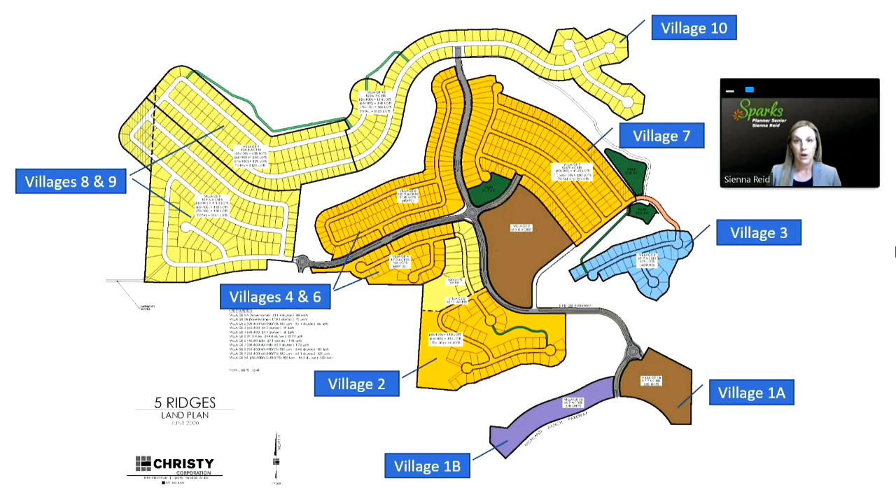For a little bit more background, in May of last year, the City Council also upheld the Planning Commission's decision on appeal to approve a conditional use permit for development on slopes, hilltops, and ridges.

A conditional use permit, or CUP, is required prior to developing sites that are larger than 10 acres in size and have slopes of 10% or greater over 25% or more of the site. The Five Ridges project site meets those criteria.

As you can see, the approved disturbance area includes natural slopes in portions of villages 1A and 1B at the southern portion of Five Ridges, natural slopes within villages 2, 3, 4, 6, and 7, generally in the center of the project site, and all or portions of villages 8, 9, and 10 located in the north and northwest portions of Five Ridges.

Areas of the site that were previously disturbed due to mining operations and roadway construction are exempt from CUP disturbance area calculations pursuant to the development agreement, and those are generally in the central portion of the project site.

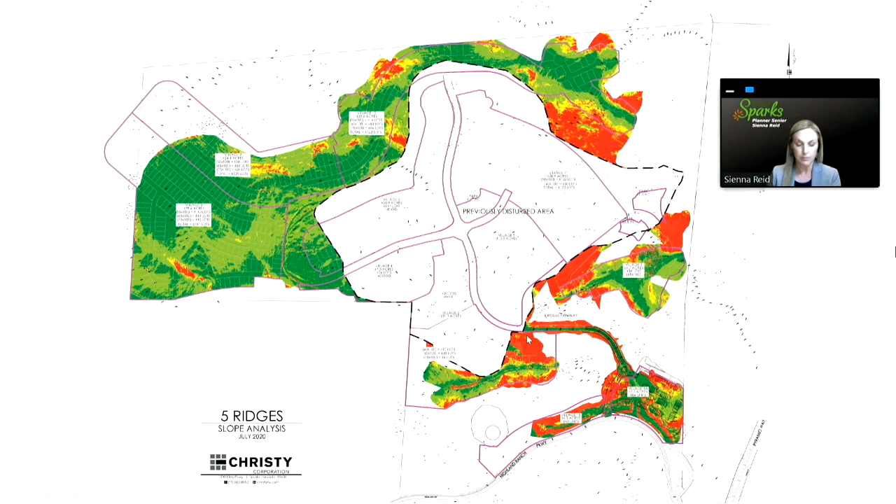Consistent with the code and the development agreement, the applicant at this time is requesting an amendment to the approved CUP to increase the disturbance area for natural slopes by a total of 19.8 acres. If approved, the disturbance area for natural slopes would increase from 138.13 acres to 157.93 acres.

The 19.8 acre increase is located in the northwest portion of the site within villages 8 and 9, and also in limited areas on the north sides of villages 1A, 1B, and village 10.

This request, it's important to note, also includes a review of grading plans for villages 1A, 1B, 8, 9, and 10 that were not provided with the currently approved CUP.

Per code, substantial material changes to a project require a CUP amendment. These grading plans do constitute a substantial material change, as the proposed grading will materially impact surrounding properties.

So the scope of this review for the CUP amendment tonight includes grading plans for villages 1A, 1B, 8, 9, and 10, and is not limited to just the 19.8 acre area where an increase to the disturbance area for naturally occurring slopes is proposed.

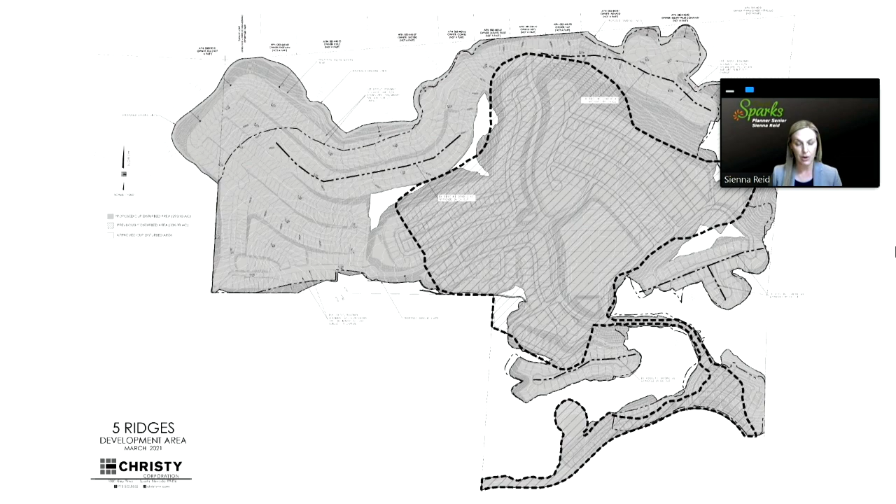From a broad perspective, to develop the Five Ridges project site, the grading plans shown on this slide in a relatively small scale show the applicant is proposing to cut existing hilltop and ridge features and use the resulting fill material to create building pads for future residential development. Fill will be used to fill natural depressions, expand ridges in the north and west portions of the Five Ridges site, and create elevated building pads in the southern portion of Five Ridges. I'll go into more detail on the proposed grading with the next couple of slides.

Village 1B generally slopes down from north to south. The northern portion of the village will be cut, and fill will be used to create a building pad that on the western side of the site is at a similar elevation to Highland Ranch Parkway. However, on the eastern side of the building pad, it will sit approximately 15 feet above Highland Ranch Parkway.

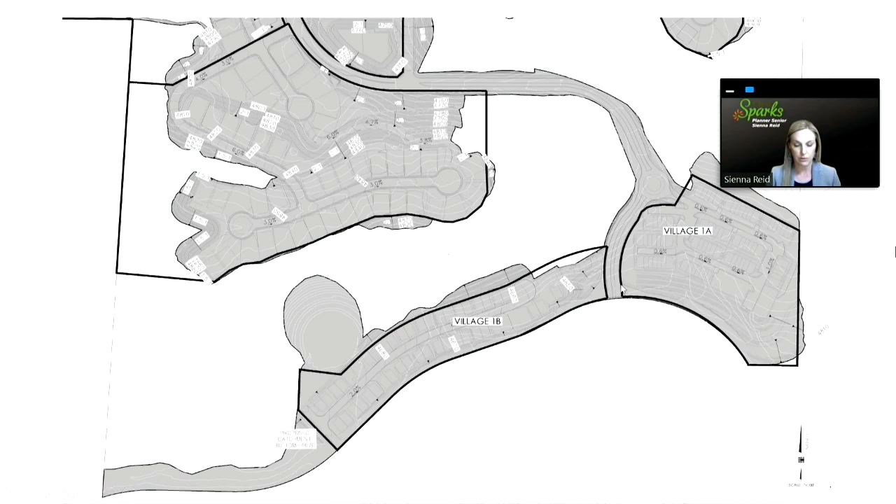To start off, existing slopes in the west and northeast portions of Village 8 - located in this general area that I'm identifying with my cursor - will be cut, and fill material will be used in the northwest and southern portions of Village 8 to create a building pad that generally slopes upward from east to west. Fill slopes spanning up to 40 feet in elevation will be created on the south side of Village 8, and fill slopes spanning up to 50 feet in elevation will be created on the northwest side of Village 8.

For Village 9, which slopes downward from south to north and is located in this general location of the project site that I'm circling again with my cursor - existing slopes in the southern portion of Village 9 will be cut, and fill material will be used in the north and northwest portions of Village 9 to create a building pad that generally slopes upward from east to west. At their longest points, fill slopes on the north side of Village 9 will span between 40 and 90 feet in elevation.

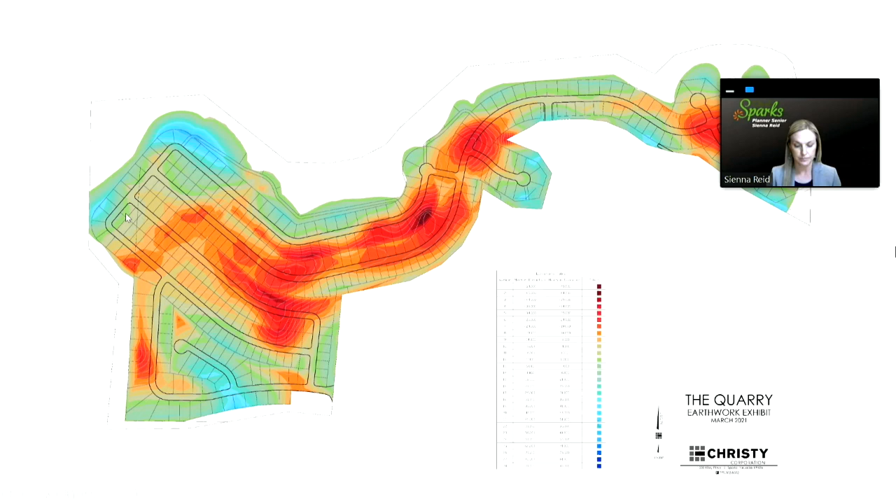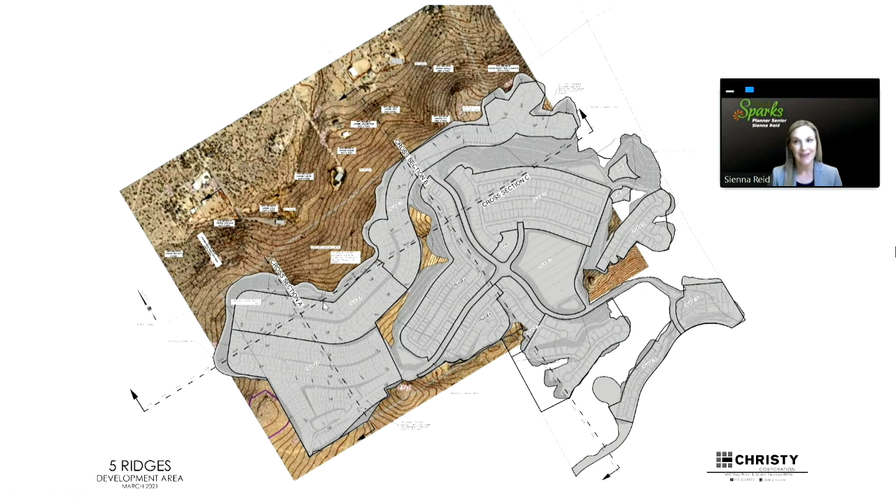Cross sections were provided by the applicant to illustrate this grading in two dimensions. Cross section A runs north to south through Villages 8 and 9. Cross section B also runs north to south through Villages 1B, 2, 6, and 10. And cross section C runs alternatively east-west through Villages 8, 9, 6, and then 7.

Graded slopes of 2 to 1, or 50%, are proposed within Villages 1A, 1B, 8, 9, and 10. Graded slopes of 1.5 to 1, or 66%, are also proposed within Villages 1A and 1B.

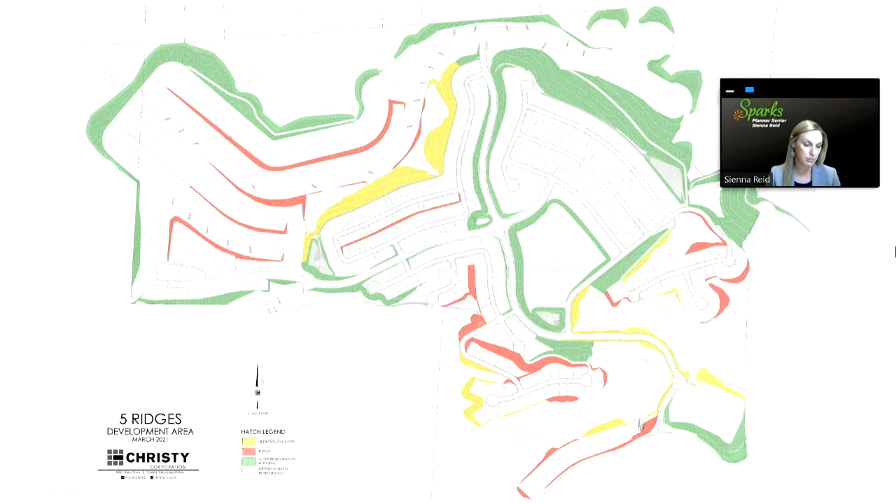Bedrock cut slopes, again with that gradient of 1.5 to 1, don't require mechanical stabilization, and they are shown in yellow, proposed in the northern portions of Village 1A and then also Village 1B in this location.

Transitioning to the code standards for development on slopes, hilltops, and ridges, and the findings applicable to conditional use permits the commission needs to consider tonight, we'll start with the standards in Sparks Municipal Code section 20.04.011, which governs development on slopes, hilltops, and ridges. From an order perspective, we'll go through standards C through G, and then come back to the design policies in B.

Starting with the grading standards, these standards establish the total area of a site that may be disturbed based on a slope analysis. As discussed earlier, the development agreement exempts the 136-acre portion of the site that was previously disturbed due to mining operations and roadway construction. For the portion of the site where naturally occurring slopes are present, the grading standards establish a maximum allowed disturbance area of 161.69 acres. Except for the disturbance of slopes of 30% or greater, these standards don't limit the area that can be disturbed in any single slope category.

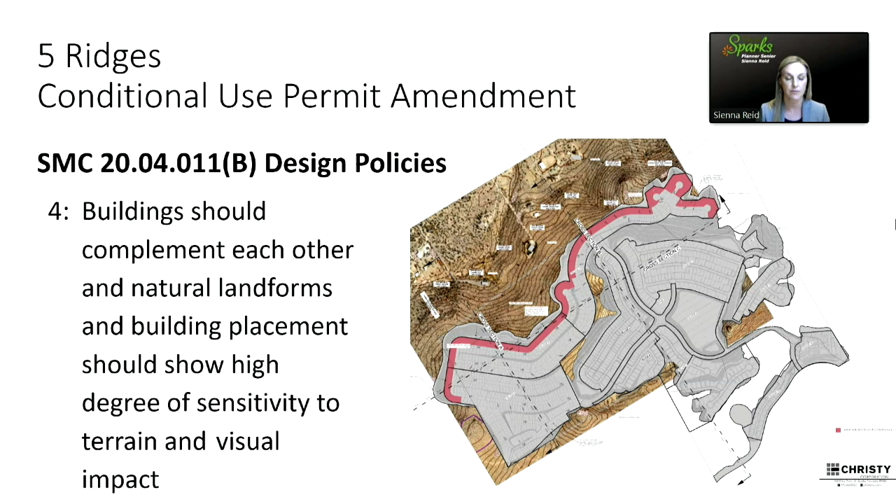Moving on to our general conditional use permit findings, the first that we have is C1, and that relates to compliance with the comprehensive plan. As proposed, increasing the allowed disturbance area by the CUP amendment request will enable development on slopes, hilltops, and ridges within the entire Five Ridges project site. This supports goal H2 and policy H2 by facilitating a mix of housing types consistent with the agreement, as well as the comprehensive plan land use designations present on the site, which allow for single family and multifamily uses.

The adopted development agreement details how city services will be provided to the site at acceptable service levels, which complies with policy CF1. For areas with slopes of 15 to 30%, policy RC 2028 indicates that total disturbance areas should be limited and that hillside adaptive architecture techniques should be utilized. Those techniques include, but are not limited to, the construction of structures on existing natural grade, split level foundations, height restrictions, and other similar techniques.

If this amendment to the conditional use permit is approved, the portion of the Five Ridges site with naturally occurring slopes that could be disturbed is less than the maximum amount of land area that can be disturbed pursuant to code and is memorialized in the development agreement, which complies with policy RC 28. As amended, Condition 6 also recommends that increased setback for two-story homes and height limitations for accessory structures further comply with policy RC 28.

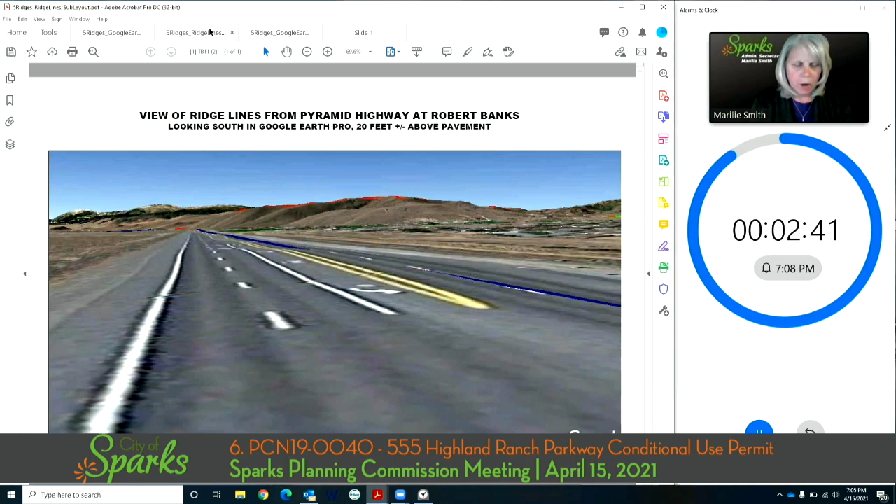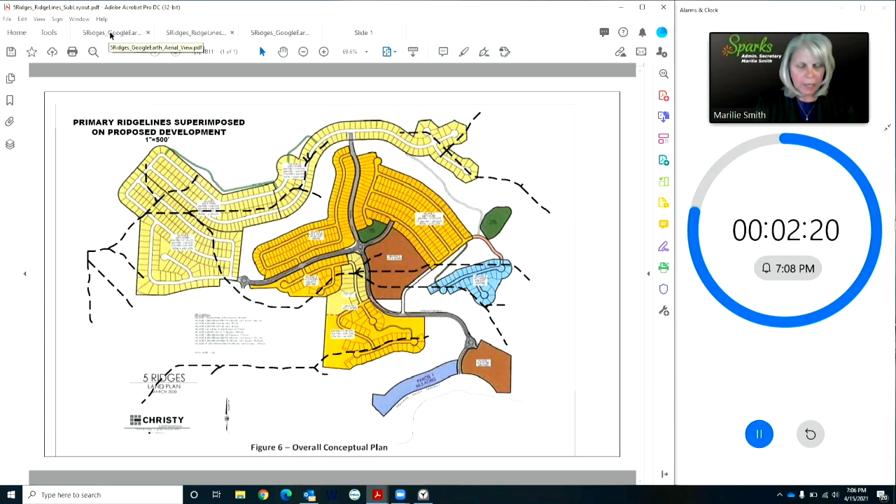This email is from Dan and Mindy Flanagan. It starts: Mr. Crittenden and Ms. Reid, we are in opposition of the request for the following. The applicant did not supply adequate information detailing the overall long-term effects of the expansion to the adjacent property owners. The applicant has not demonstrated adequate dust or erosion control measures for the groundwork completed to date. The applicant has not modified or revised the traffic study showing proposed impacts as a result of the expansion request. The applicant has not demonstrated the fiscal ability or bonding to remediate or revegetate any future disturbed area and/or resulting litigations due to property damage if applicant becomes insolvent. The rockery walls proposed by the applicant have been known to fail, which could render damage to the residents below the ridgeline.

The City of Sparks has not amended section 20.04.011, slopes, hilltops, and ridges, for the subject site as is required. Once amended, the City of Sparks is creating a double standard by not allowing the visual impacts under section 20.04.011 on the City of Sparks sides of the ridgelines, but ignoring 20.04.011 for the Washoe County sides. Improper noticing to residents under Sparks Municipal Code, Chapter 20.05, specifically Section 20.05.03, Section B. Applicant should be required to amend their allowable disturbance areas only on a subdivision by subdivision basis in order to remedy the above concerns on a case-by-case basis. Respectfully submitted, Dan and Mindy Flanagan.

Moving on to the next email. This email was received from Violet Richards.

Dear Ms. Reid, we are opposed to the proposed changes in the Five Ridges project. We have lived on this property for 38 years. We have, of course, seen a great deal of change and growth in our time here, however, not like this growth. Part of living on a ranch property is being able to see the mountains and the sky.

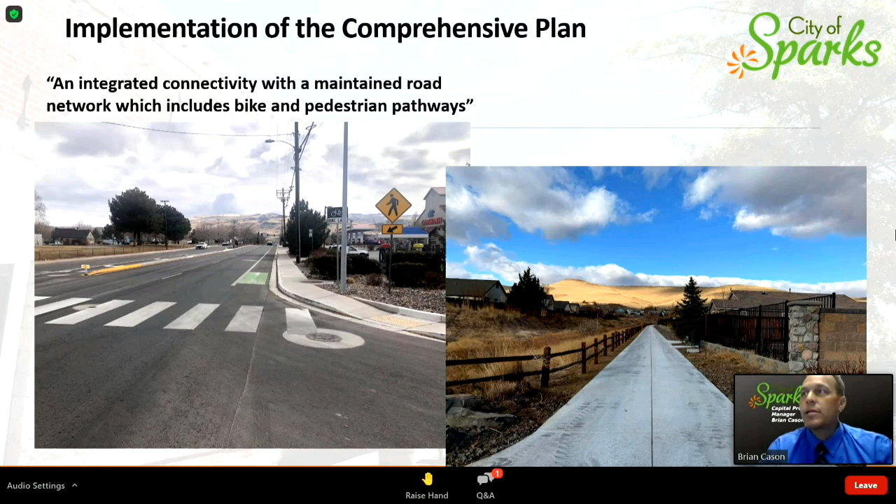These next three slides show some examples of how the proposed Capital Improvement Plan is in conformance with the Sparks Comprehensive Plan. One of the visions within the comprehensive plan is maintaining an integrated connectivity with a maintained road network, which includes bike and pedestrian pathways. These are two examples of projects that have been completed over the last year that show how the Capital Improvement Plan has implemented the Comprehensive Plan. The picture on the left shows the rehabilitation project that was completed on Prater Way, and the one on the right shows a pathway in North Sparks that has been rehabilitated.

And then the vision to ensure Victorian Square functions as a vibrant downtown with living, shopping, restaurants, and commercial is represented by the projects that have been completed in the past and will continue into the upcoming fiscal year. One example is the Downtown Barricade Project, and another great example is the continuation of the Victorian Infrastructure Improvement Project.

Lastly, one of the goals for the Comprehensive Plan is to maintain, or as necessary upgrade, the condition of city-owned facilities and infrastructure while maximizing their utilization. This is represented in many of our capital improvement projects that include HVAC replacement projects, remodels, electrical upgrades, and security upgrades.

With that, I will go through a few of the funds that are included in the capital improvement plan. I'm not going to hit on every single one, but I'm just going to highlight some of the main projects and particular funds that we're going to be working on for this upcoming fiscal year.

The first one is the Transportation Projects Fund, Fund 1401. We have just over $3.2 million in projects planned within this fund.

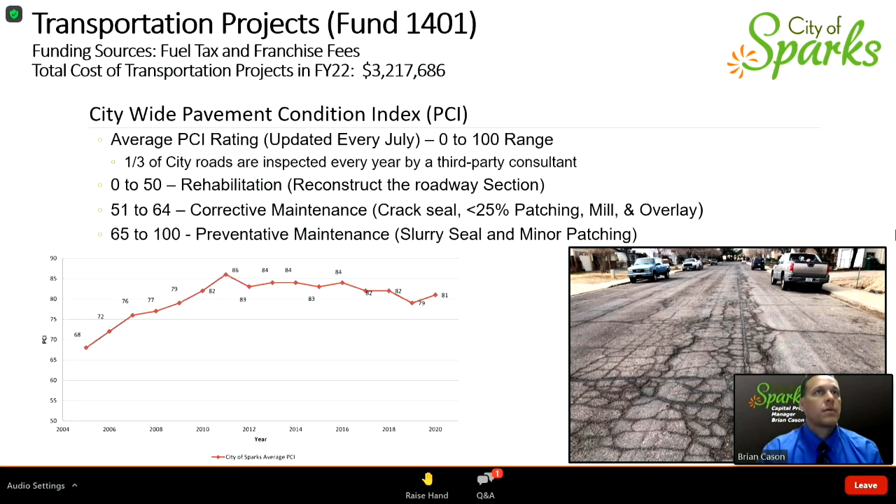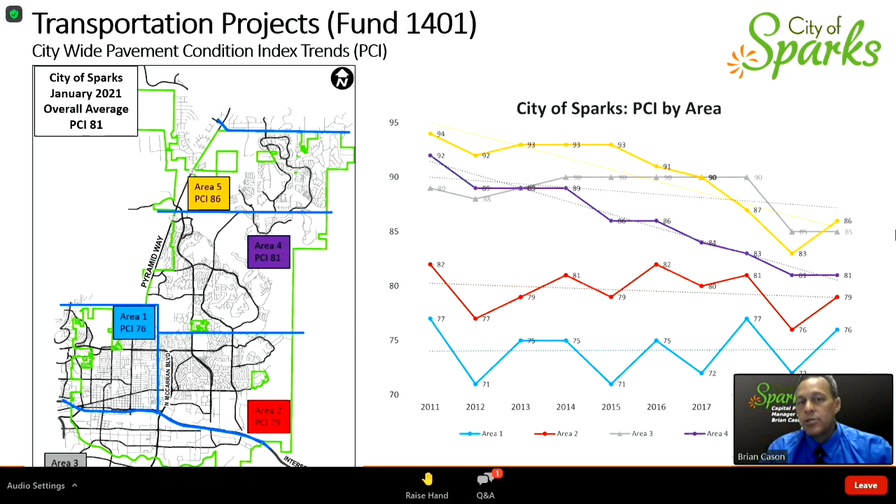This next slide shows how the city is broken up into 5 areas rated with this pavement condition index. The range within each area goes from 76 in the older downtown areas where the roadways are older, up to the North Valleys or North Sparks area with a PCI rating of 86. That graph on the right shows each individual area going back to 2011 and how they compare to each other.

This next slide is what we have planned for a rehabilitation project for FY22. The total cost is estimated at $1.2 million. It is located just to the east of McCarran Boulevard, on the north and south side of Greenbrae Drive, with an average PCI of 34, which falls within that 0 to 50 PCI rating.

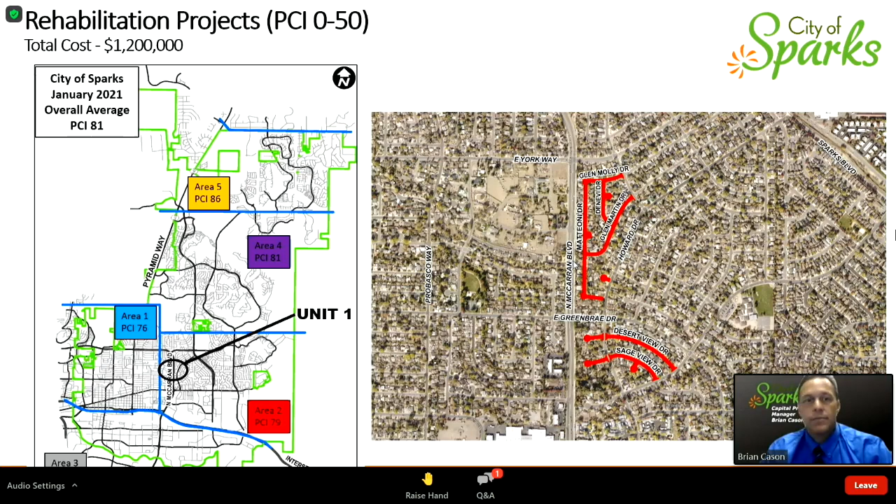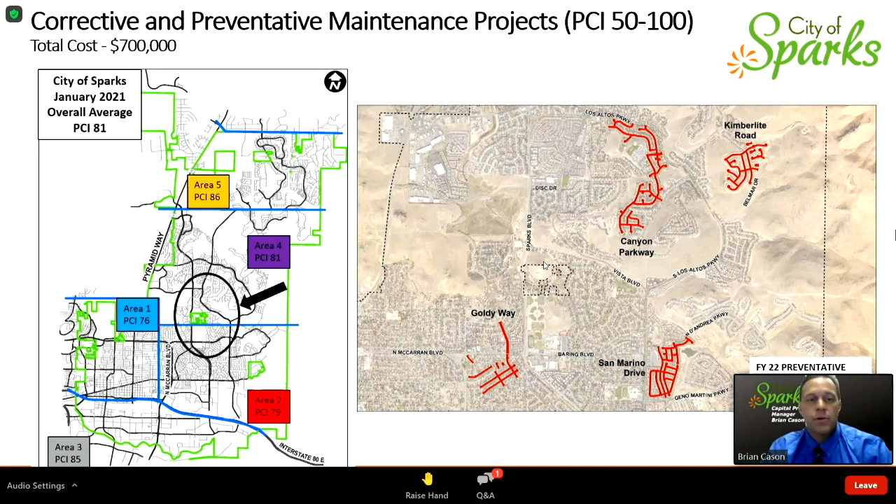The next fund I'll talk about is the Community Development Block Grant Fund, or CDBG. This is where low to moderate income residents make up greater than 51% of the residents living within that area. We get a grant every single year, and hopefully continue to get those grants to redo the concrete curb and gutter, sidewalks, and roadways within those areas.

We've broken it into 5 different phases. On the south side is redevelopment area 1, where we also have an additional $300,000 to combine with the grant so that we can get a better bang for our buck and get more cost recovery from a larger project.

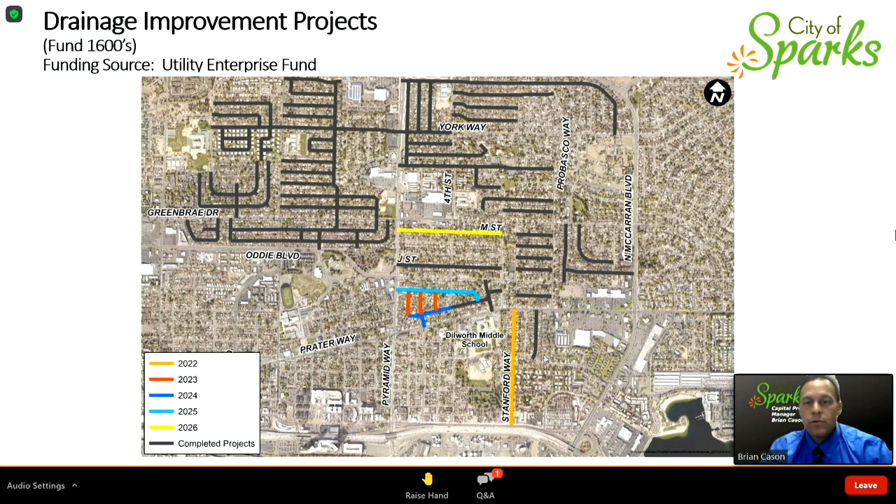In collaboration with the Transportation Division and the Utility Enterprise Fund, we have projects where we're trying to be proactive with the utilities that remain within some of the roadways. This particular plan for the next 5 years includes these streets in color, and the gray streets are ones we previously constructed in the past. This includes replacing the utilities within that area as needed, along with replacing the roadway structure and the concrete curb and gutter. It's not always every bit of it, but we replace what needs to be replaced.

And then the sanitary sewer project in Fund 1631. One project to highlight is a design project to redo the sanitary sewer system within the roadways along East Quail Street, Greenbrae Drive, Probasco Way, and along Boise Drive. Lastly, within this fund, we have a sewer system rehab program that we include on a yearly basis.

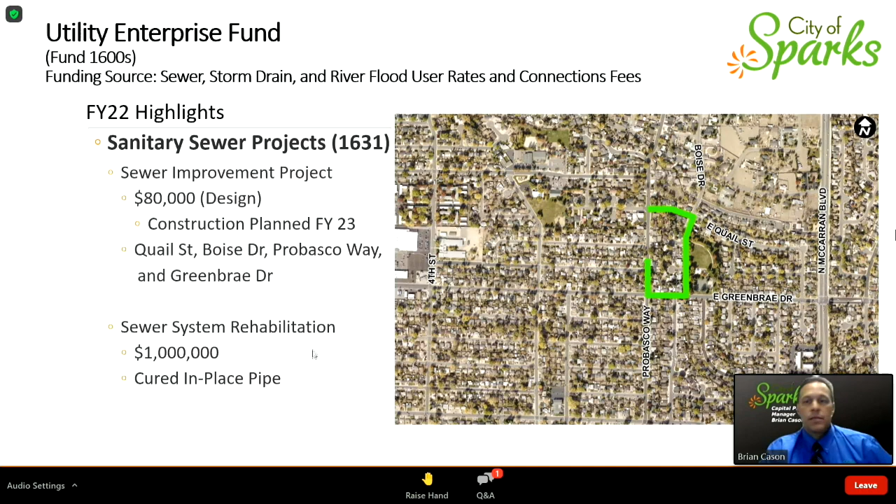In FY22, we are going to focus on cured in place pipe, or CIPP. These next couple slides show you an example of what that is.

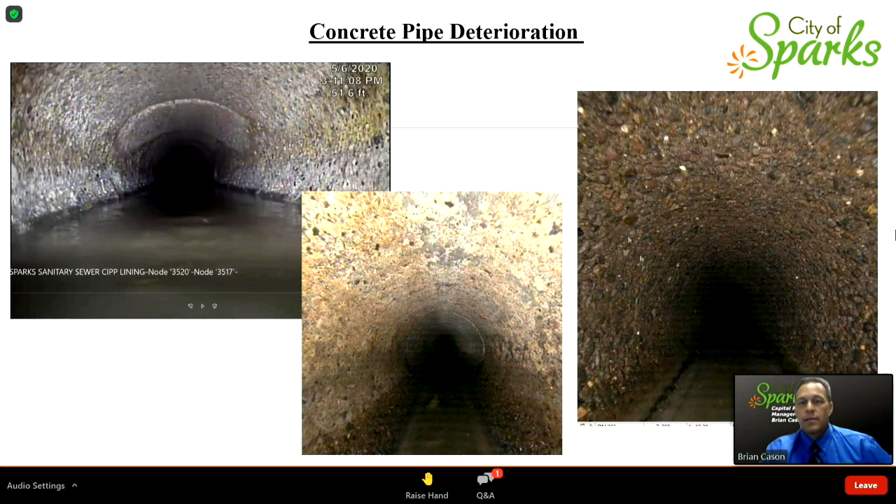This slide shows some existing sanitary sewer lines that have shown a lot of deterioration over the years. There's a lot of rocks and basically deterioration of the pipe within the pipe.

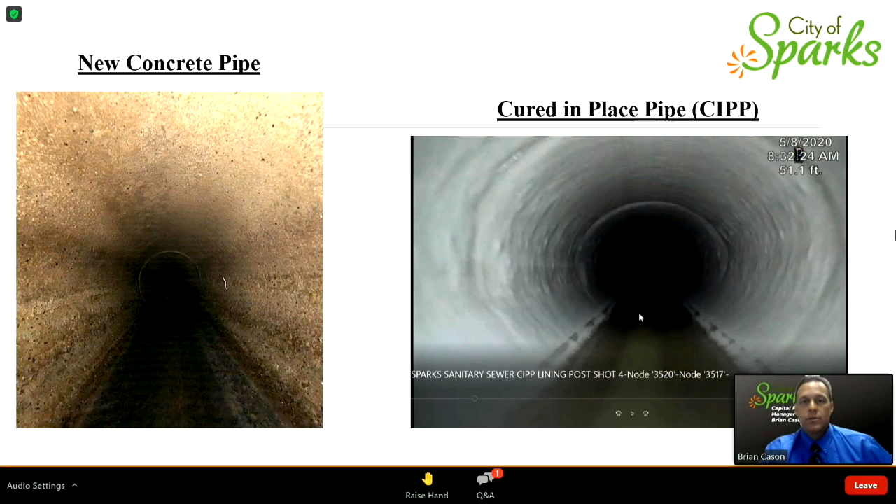This next slide shows you a new concrete pipe versus a cured in place, or CIPP, pipe, where they essentially extrude a liner through the center of the pipe, and through a chemical reaction, the pipe hardens and becomes essentially a PVC pipe. It lasts for a very long time and has a good smoothness ratio to allow material to flow through very easily.

The next one, the storm drain projects, Fund 1641. We have a couple different projects planned: the manhole CCTV assessment project, which allows staff to go through and assess the different manholes throughout the area and determine whether or not they're leaking and whether improvements need to be made, along with a storm drain master plan update, which allows staff to plan for the future of what projects may be put in the capital improvement plan.

And then we have the river flood project. We have a design project to look at flood improvements for the North Truckee Drain, which runs from just north of I-80 up to Prater Way along Sparks Boulevard. This will be coordinated with the RTC Sparks widening project that will be coming in the future.

The next fund, the Capital Projects Fund, Fund 1404, is broken into three different areas, one being Fund 1404A, the facilities and equipment portion of the fund. This is funded through a 2.5% general fund transfer, and we have just over $1.9 million in projects planned within this part of the fund.

Then we have 1404B, the IT hardware portion of the fund, funded primarily through marijuana business license fees, with just over $274,000 worth of hardware replacement coming in the next fiscal year. Finally, 1404C, IT software, also funded primarily through marijuana business license fees, with $379,000 worth of software products to pay for over the next fiscal year, with a total cost to Fund 1404 of just over $2.5 million.

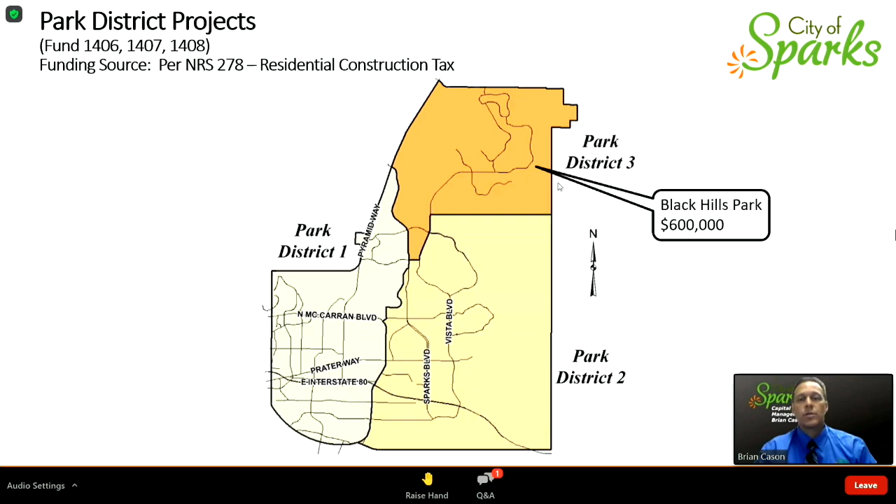Then we have the Victorian Square Room Tax Fund, or Fund 1415. Funding comes from hotel taxes throughout the city of Sparks. We're funding a program for the Victorian Square Barricade Project, with $900,000 in this fund plus an additional $700,000 in RDA 1.

In RDA 1, we're trying to manage that fund and maximize the funding available, since it will be discontinued after fiscal year 23. This fund is funded through property taxes in the downtown area, and we have additional funding for the barricade project of $700,000.

We also have the Victorian Square Infrastructure Improvement Project, Section 2C, for $800,000 to continue those infrastructure improvements along Victorian Avenue. Finally, there's additional funding for the Community Development Block Grant for $300,000.

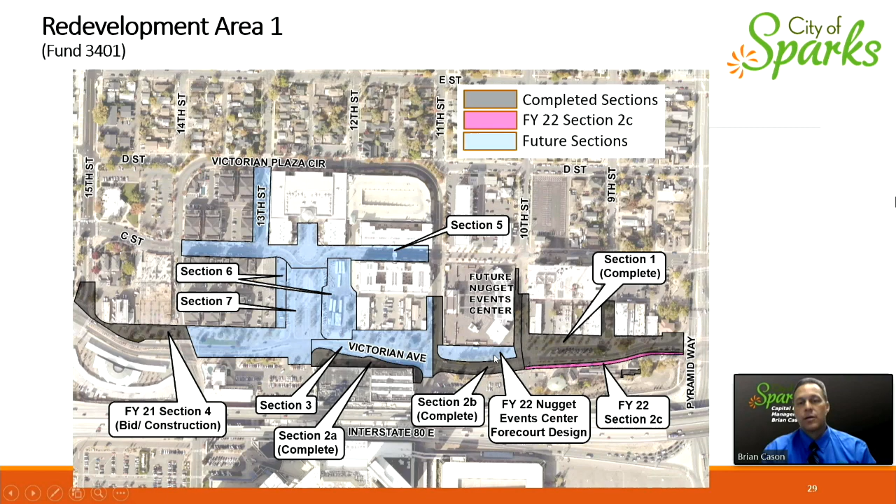We have previously approved FY20 CIP funds, along with about $200,000 worth of grants received over the last couple of years. We're still going to be a little short on funding, so we're proposing $150,000 come out of RDA, or Redevelopment Area 2, to fund this project so we can get it going this summer and start construction.

With that, that concludes my presentation. Staff recommends that the Planning Commission find the proposed Capital Improvement Plan for fiscal year 2022 to 2026 in conformance with the Sparks Comprehensive Plan and forward a recommendation of approval to the City Council.

I'd be happy to answer any questions you might have. I also have Amber Sosa and John Erickson available if you have any specific questions about the utility or transportation fund.